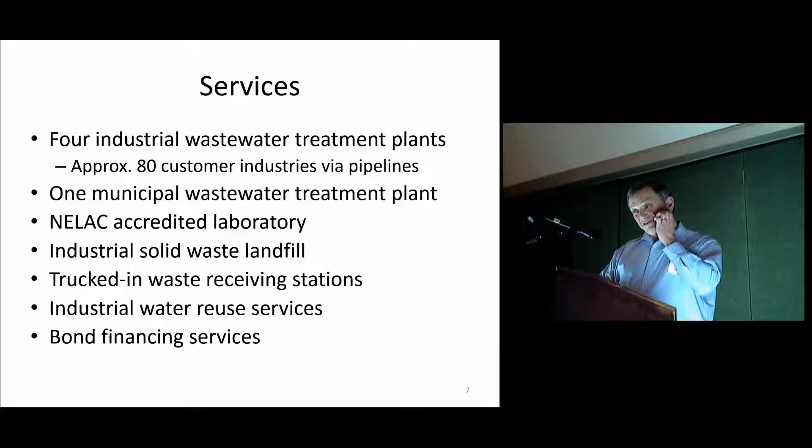We've already issued to date over about $3 billion worth of bonds, private activity bonds and tax-exempt bonds. So if anybody's looking at a project and you think it might qualify, get in touch with us.

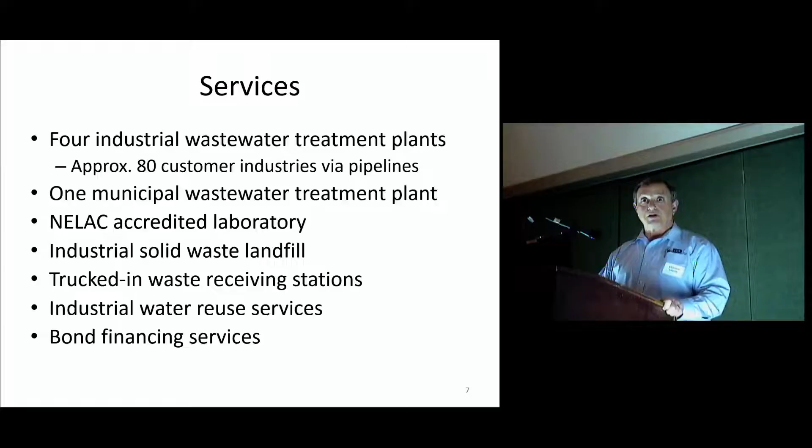Here's our value added: what we do is provide services to the chemical companies. Y'all make chemicals, we make our product — we clean up your water. Several people go together, and it's going to be cheaper to operate.

We've been doing this for 45 years, I think. And in the Bayport area in particular, by having that centralized waste treatment plant, that area has just exploded over the years. Even during the '80s, for those of you who remember, that area kept bringing in new plants.

Okay, we're going to talk a little bit about wastewater. Again, I'm assuming nobody knows anything. I only have — David told me to keep it under 2 hours, so.

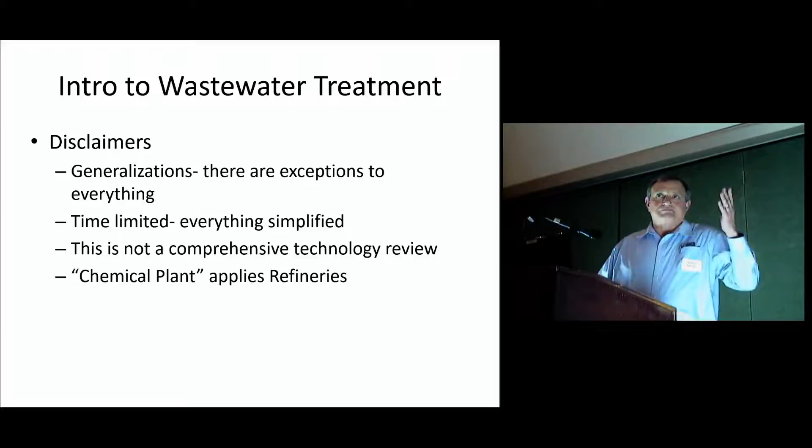I'm going to have to generalize a lot on stuff, right? Everything's going to be simplified. There's an exception to everything I say. I'm not going to do anything comprehensive, I'm going to simplify this. David said I had to throw some technical stuff in, so I threw a couple equations in there. And if I say chemical plant, it's kind of a generic term, refineries and so on. I know it's not, but just for the interest of time.

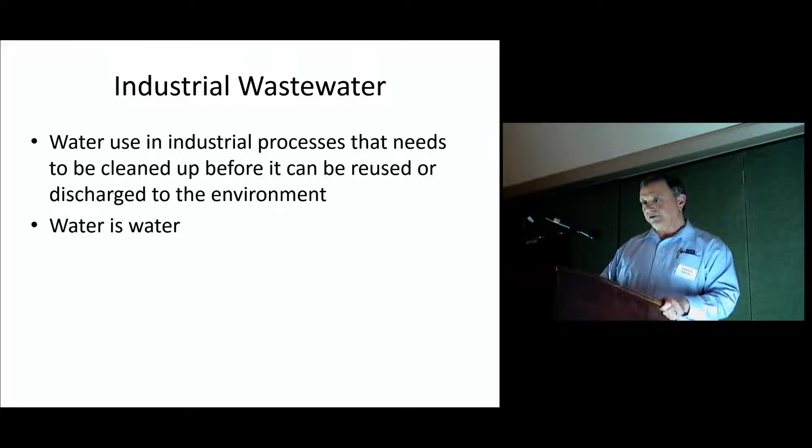We're talking about industrial wastewater, it's stuff that's used in a process and needs to be cleaned up. I'm going to use the term wastewater - that's kind of a no-no in our business now, since water's supposed to be water now because of all the reuse. But I'm old enough to do what I want.

When we're talking about chemical process industry, there's some things that really differentiate it from wastewater treatment, from a process standpoint. In the chemical industry, you pretty much have control over your feedstock. You issue certain specifications - if you don't get it, that stuff goes out, it doesn't come in. We don't have that luxury.

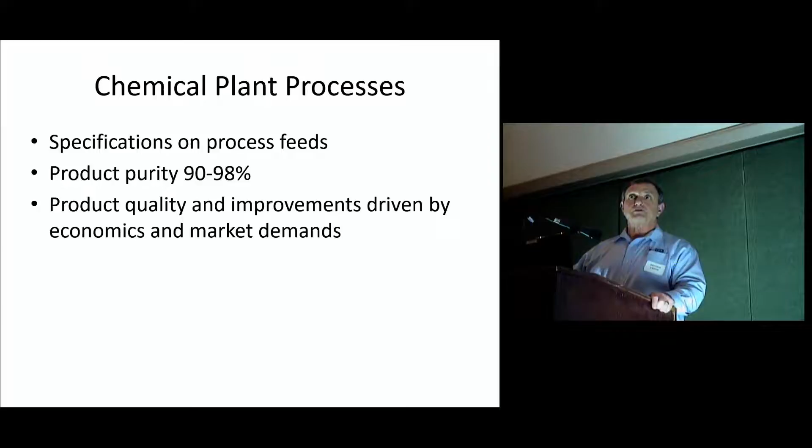The product purity you're shooting for is somewhere between 90 and 98% pure. And if you're looking at doing some improvements in quality, you've all done this - you have to do an economic analysis to see whether it's worth doing and whether the market will support the extra cost.

On the other hand, in wastewater treatment, we've got a lot of variation in our feedstock. We start out with something that's 99% H2O, and that's counting the dissolved chemicals and salts for the most part.

Our product quality is driven by regulations and different laws that come out in the interim. And in some cases, we actually have regulations that dictate how we have to design things - the actual technology that needs to be used.

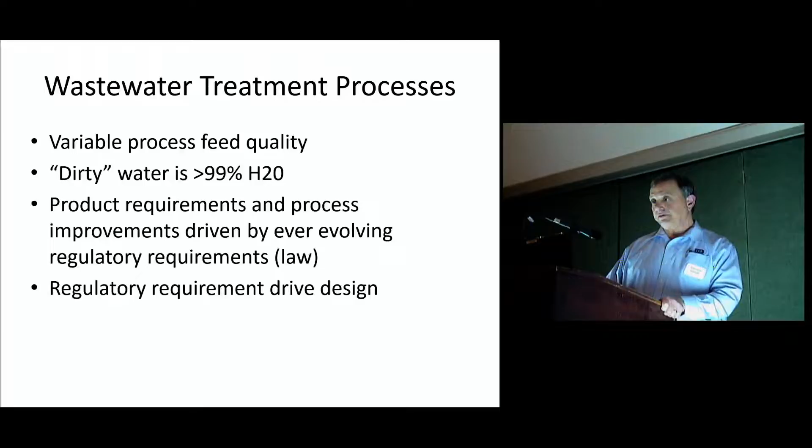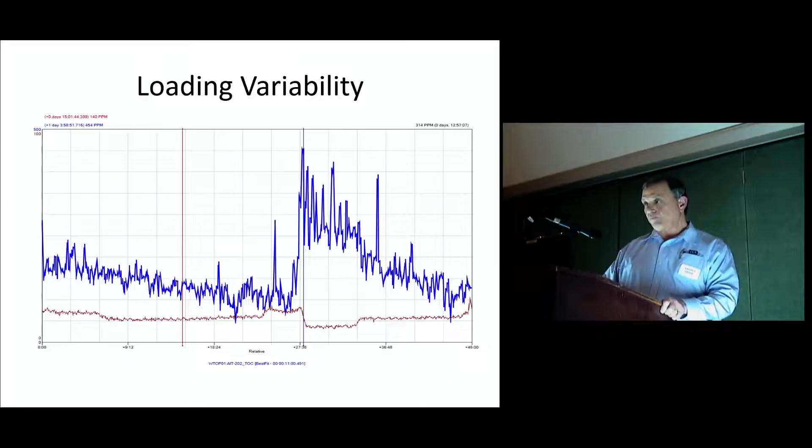Key regulations that have been driving things are the Clean Water Act, obviously, RCRA - the Solid Waste Resource Conservation Recovery Act - and the Clean Air Act. They all have a different way of demonstrating compliance.

You can't use the same analytical technique to measure the same compound from one regulation to the other.

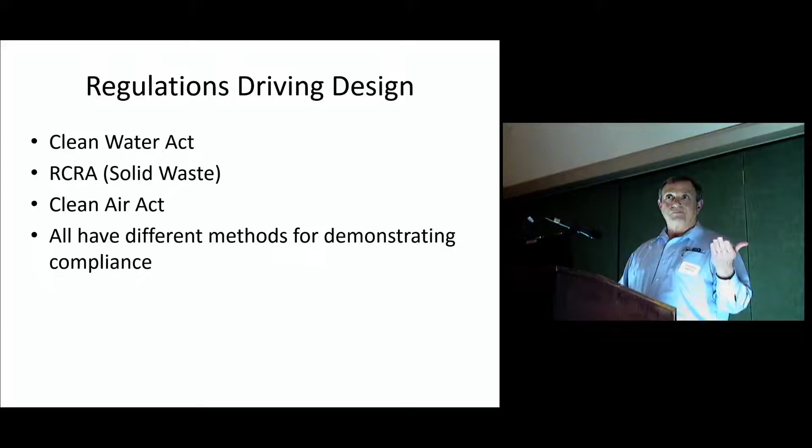In terms of what we measure, we measure a lot of stuff, and we kind of simplify to measure the impact of it. When we measure the organics, we measure oxygen demand - how much oxygen it takes, either biochemically or chemically, to oxidize it.

The interesting thing about the BOD test - the biochemical oxygen demand - is you take some stuff, put it in a bottle, wait 5 days, and measure how much oxygen is being used. Now, where did 5 days come from? It's a very scientific thing - it's how long it takes to float down the Thames River.

As a rule of thumb, the relationship between BOD and COD is known only to God.

We also sometimes measure the amount of organic carbon in the waste material - that's called TOC. We have a tendency to measure classes of compounds: organic nitrogen, phenols, oil and grease. But we also have to measure specific compounds: phenol, benzene, etc.

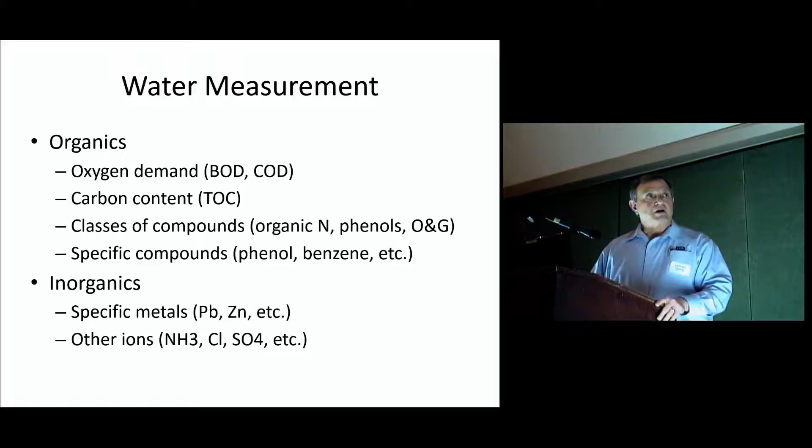We measure inorganics as particular ions. Ammonia and nitrogen - ammonia may be considered organic, but we measure the other anions too: chloride, sulfates, all those different ions in there.

We measure stuff at really low levels. We start out with milligrams per liter, and for other ions, parts per billion, micrograms per liter, nanograms per liter, and in cases like dioxins, we measure picograms per liter.

One of the things this is really useful for is for people that want to advocate a position - measuring at really low levels. You're discharging 500 parts per billion into the environment. No, we're not - we're only half a part per million, not billion.

And we have special sampling and testing requirements that we have.

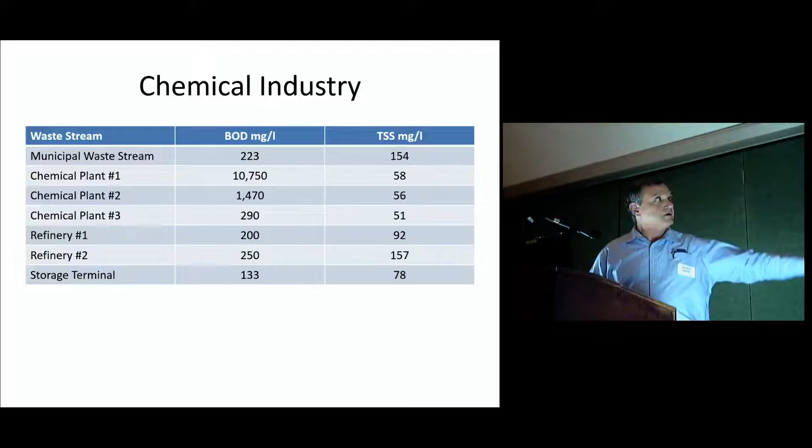Now I'm going to start talking about some of the more technical stuff. The main thing wastewater treatment was originally designed to do, for industry anyway, was to reduce oxygen demand on the streams. You put organic material and nitrogen in the water, you're going to grow bacteria. Bacteria use oxygen, oxygen in the stream disappears. Fish don't like that, so they turn over and die.

The other big thing, the biggest thing for a long time for municipal waste, was public health. In 1900, there was an abnormally large amount of deaths from waterborne diseases. Once they started putting in proper disinfection, that changed.

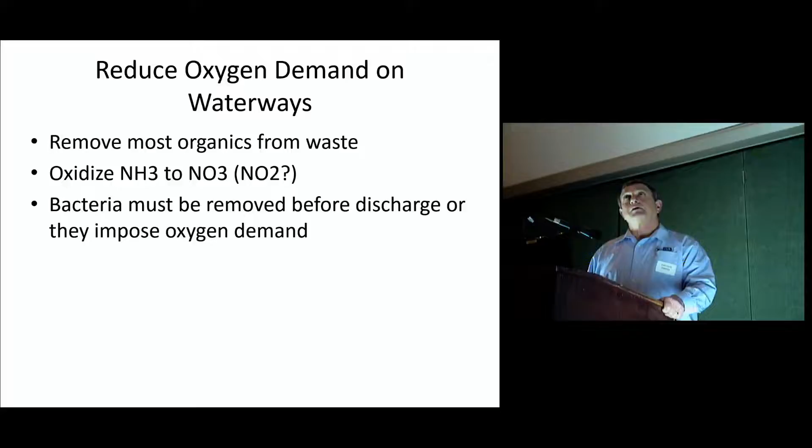I heard someone say something about overheads. These were originally overheads, okay.

Biological treatment is simple. You start out with bacteria, it eats some food, it divides. You have two. Obviously these are from Gulf Coast, they're all smiling. And you end up with a little bit of food left over.

This next one's a technical slide. Basic concept: you have food, organics, oxygen, and to grow more bacteria you need the proper nutrients - we're always talking about nitrogen and phosphorus for that. What you end up with is carbon dioxide, bacteria, and organics. Real simple thing. And then you take your bacteria out, otherwise the bacteria use up the oxygen in the water. It doesn't work.

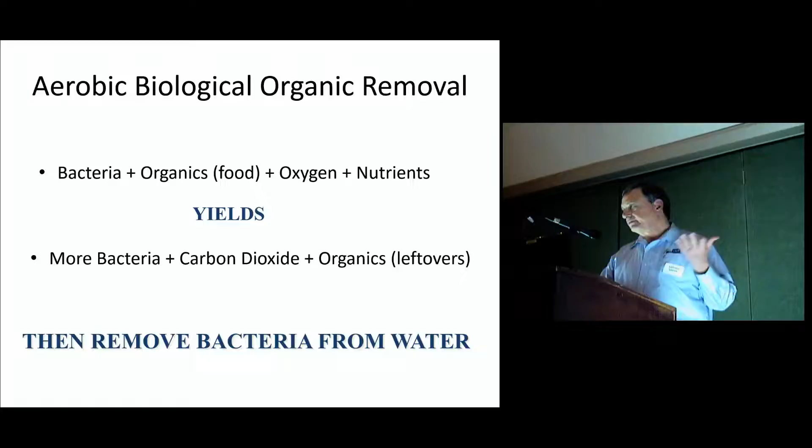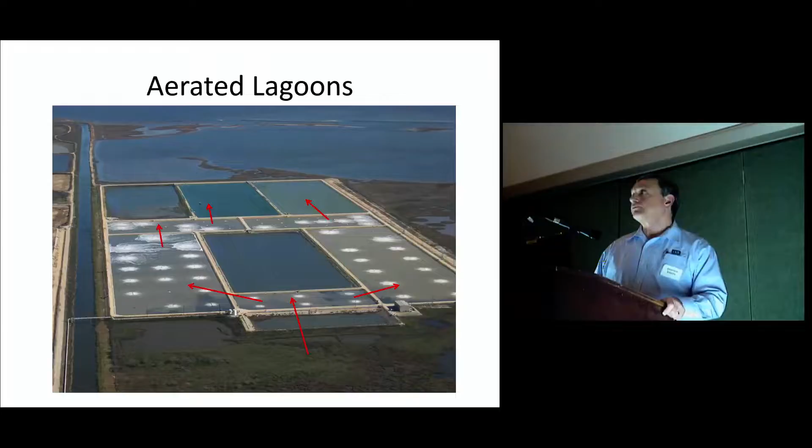This is really the simplest form of a biological treatment system, called the aerated lagoon. What you do is put the wastewater into a basin, aerate it, and bacteria start to grow. This particular one is 160 acres, if you have a lot of surface area - these are earthen ponds. This doesn't operate like this anymore, but this is what it was like back then. The amount of bacteria grown depends on how much waste comes in here. Like I said, it's 160 acres, or for any of you old farm people, it's a quarter of a section. So it worked pretty well.

The kind that's really simple and mostly in use right now is bacteria eats some food, it divides - the sludge process. We use aerobic bacteria, it's a suspended growth process. We may take out some inorganic compounds, but that's just by accidental adsorption. Works pretty well.

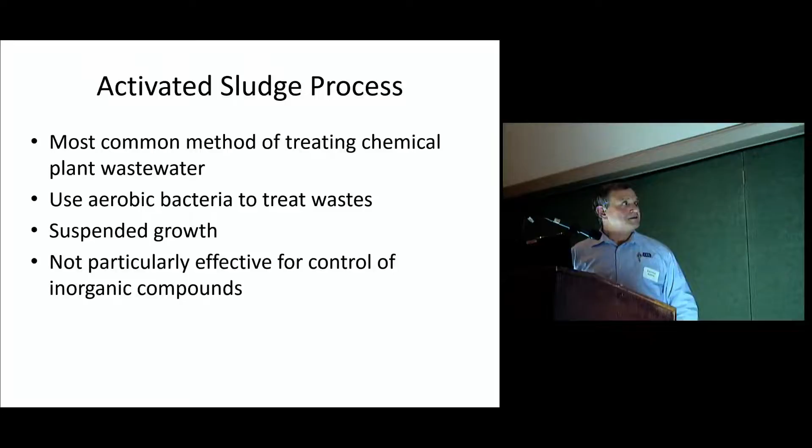The organics come in here, we grow bugs, or bacteria - it fits a whole lot better. We use aerobic bacteria. You go into an aeration basin, the bacteria grow in there, you keep your conditions correct. Then you go to a clarifier - everybody here has had unit operations, you know how clarifiers work. So you settle the bacteria to the bottom, collect that bacteria, and put it back into the aeration basin so you can have more bacteria and treat waste quicker.

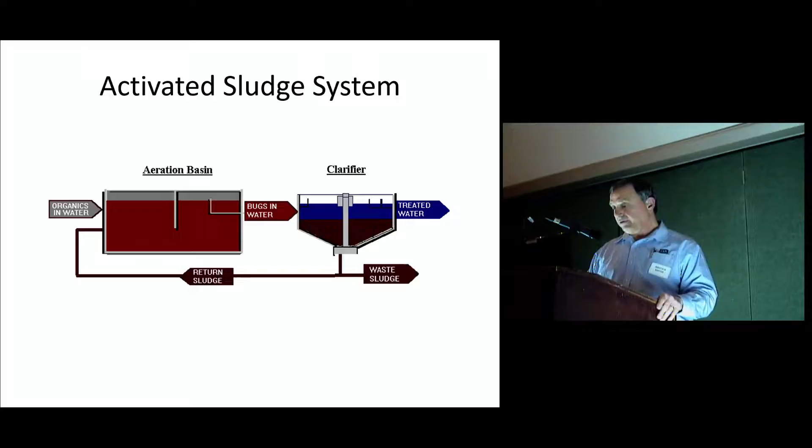Obviously closed loop systems do not work. So what we do is with some of the bacteria growing, we settle it to the bottom and then dispose of it, taking the water out of it. That's the waste sludge. This lets you have more bacteria in the aeration basin so you can treat waste quicker.

So what we do with some of the bacteria involves some basic process kinetics. Typically when you're designing a plant, you have a bunch of different compounds that degrade at a whole bunch of different rates, and we just kind of lump them all together and say this is what happens to the wastewater. It's also impacted by temperature.

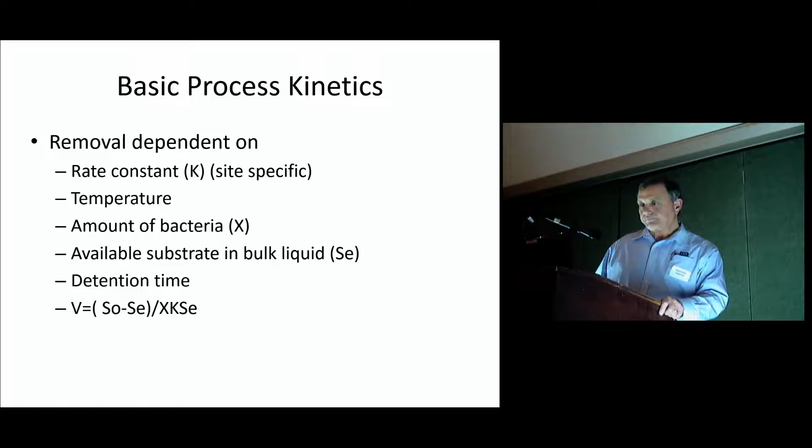In terms of impacting kinetics, there's a lot of things that could affect it. For the same type of waste, you can put some material in there that will actually inhibit the way the bacteria works, and they won't perform. If you don't have enough oxygen, the reaction rate is limited. If you don't have enough nutrients, you can't build bacteria.

For the same type of waste, you can put material in there that inhibits the bacteria from converting it all the way through to carbon dioxide without going through the building mode, and that takes a lot of time - it's a much slower reaction, very temperature sensitive. If you don't have your pH in the right range, you can actually stop biological activity - the bacteria just stop dead, unable to convert to carbon dioxide, without pH right in the correct range for the building mode.

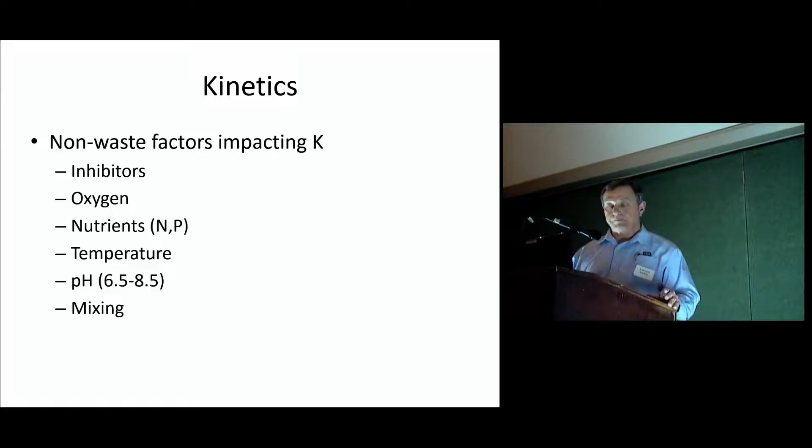Slower reaction, very temperature sensitive. You all recognize the Arrhenius equation. It works in wastewater the same way, except once you get above 35 to 40 degrees, depending on the system.

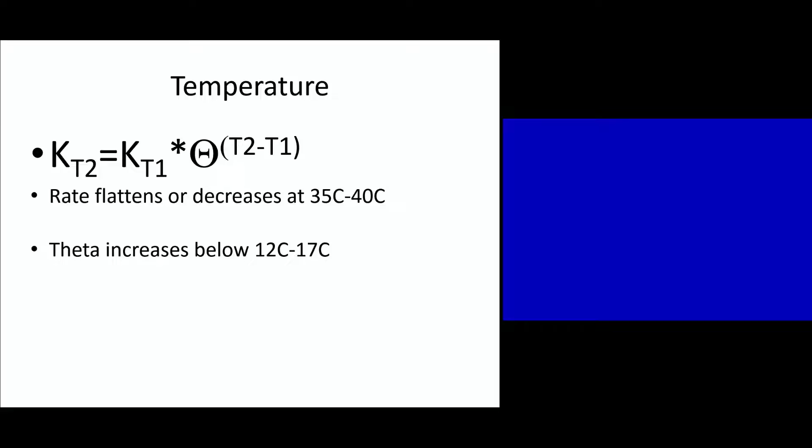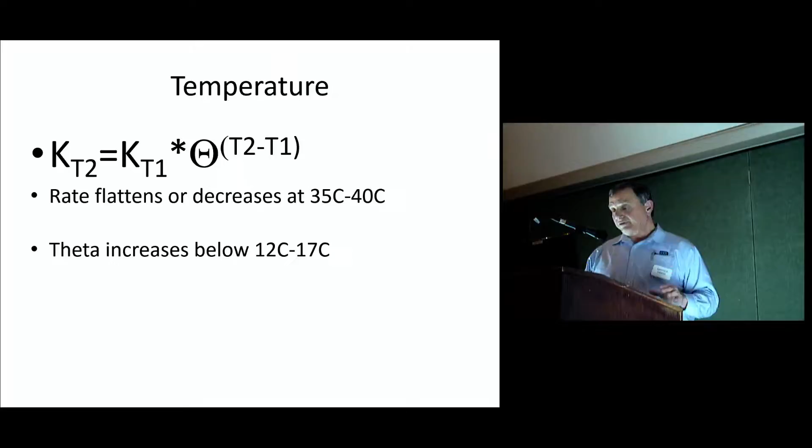The bacterial reaction rate will actually decrease above that range, around 95 to 105 degrees. When you get cold, you can have a rapid decrease in your ability to treat the waste, particularly with certain substrates, somewhere in the 55 to 65 degree range.

When we put oxygen in the water, most of the time it's atmospheric oxygen. There's a couple ways we do this, using surface aerators or air. The rate of oxygen transfer depends on the amount of energy you need to put in. There is oxygen in water even at very high temperatures, but if you're trying to keep a certain minimum oxygen level and the temperature is high, saturation goes down, solubility is lower, so it takes more energy.

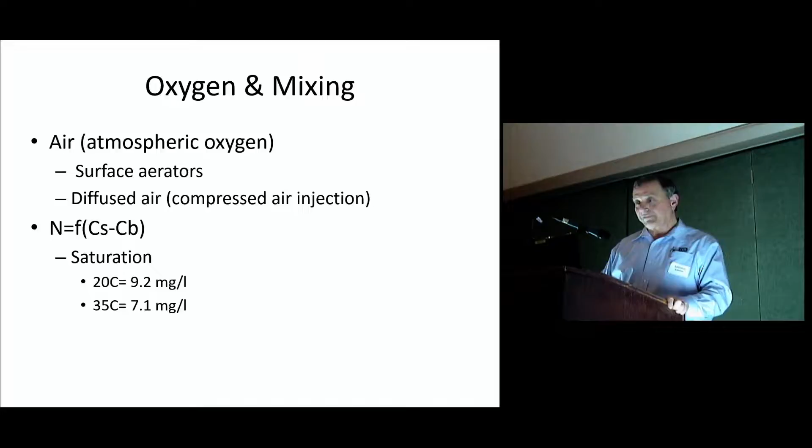One of the ways, particularly in the old days, was pretty common: surface aerators, high-speed surface aerators. Over there on the right, this thing runs about between 1,200 and 1,700 RPM. It throws water into the air, making real small drops. They're really good at transferring oxygen, but they're also really good at cooling and stripping things out of the water.

In the lower left, there's our low-speed surface aerators. These throw water in the air too, but they're geared down to be under about 100 RPM. They're more efficient than the other type, but obviously more costly because of the big gear.

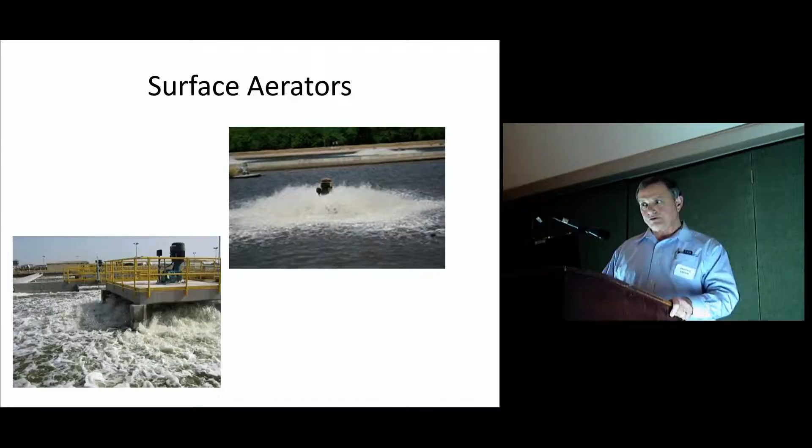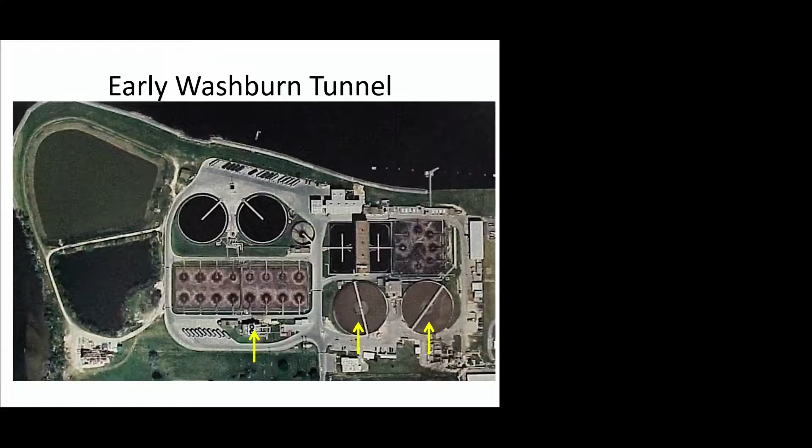The next step, again typical of pulp and paper plants in that day and age, we had a cooling tower. It was just a normal contact cooling tower with a bunch of wooden slats; water goes through and cools off, and that's another way to help control temperature in the aeration basins, activated sludge, clarifiers, before discharge to the ship channel.

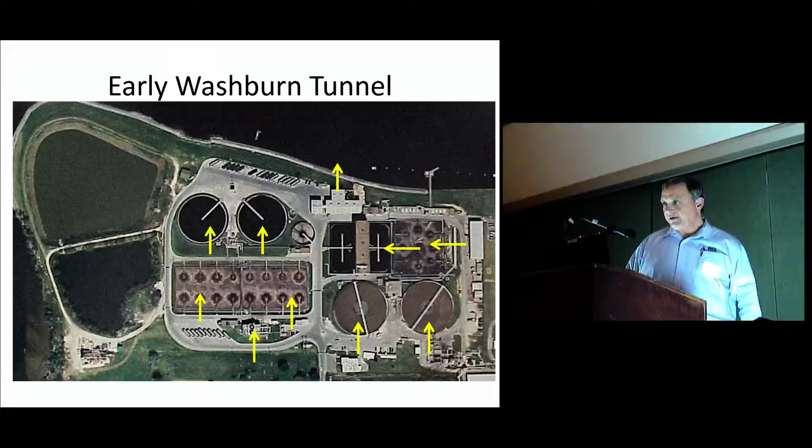So in 1972, the Clean Water Act was passed. By 1985, every water in the United States was supposed to be fishable and swimmable. It's really a framework for all the future laws that came out, and one of my favorite parts is they actually define classes of pollutants in here.

Prior to 1972, depending on where you built a plant, you would have discharge limits based on what the individual state thought the stream could handle. As part of the Clean Water Act, they said everybody from a particular type of industry has to meet a protected certain standard.

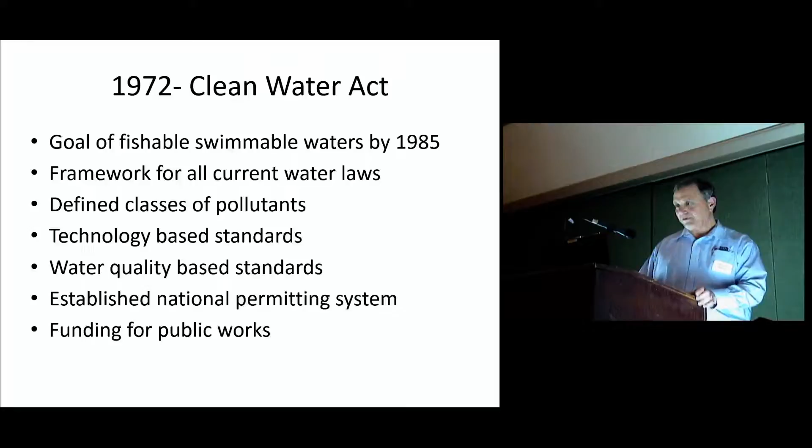NPDES is the National Pollutant Discharge Elimination System. The first phase technology standards were to be met by 1977 as the best practicable control technology, under Public Law 92-500, the Clean Water Act. By 1983, everyone was going to need NPDES best available control technologies, but some of the technologies weren't defined, so permit writers had to use judgment in deciding what these standards meant.

1972 is also the year I graduated and started doing that kind of work. A lot of the early design work we did was actually to demonstrate technologies through reactor studies and pilot plants, producing early designs that people considered the best available technology at the time, since 1972 technology just wasn't there yet. Then in 1987, they really came out with guidelines that had probably the biggest impact on us.

These were the organic chemicals, plastics, and synthetic fiber guidelines, and related standards. In 1987, there were around 70 different specific organic chemicals, plastics, and synthetic fiber categories covered.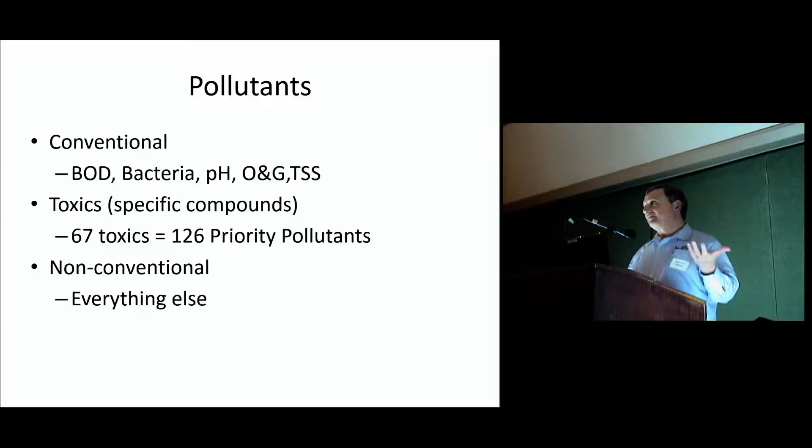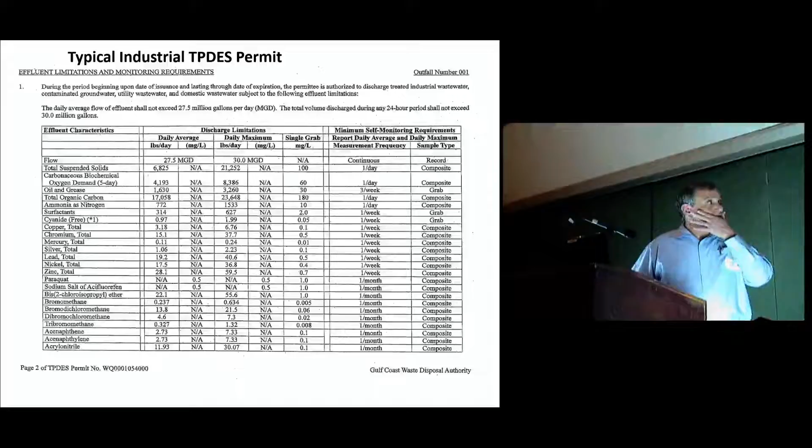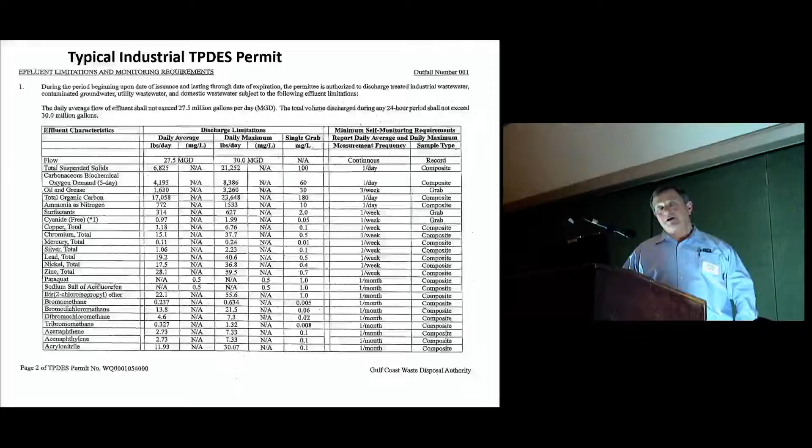What were all the requirements in that permit? There's some additional requirements written in there, one of which is a WET test, a whole effluent toxicity monitoring test, where you put bacteria or organisms in cups and see whether they die or whether the eggs don't form properly. If they don't, you have to figure out what happened.

Back in the 80s, before regulations tightened, this is what a treatment plant might look like. This is our Bayport facility. Gulf Coast treats all the wastewater from the Bayport Industrial Complex, and that area has been growing like crazy since it was first built. I'm going to show you the original Bayport treatment plant here.

In the modern day plant, that's a sump, but that was the original treatment plant. At this time, the wastewater came in, went to an earthen lagoon where we let the wastewater mix to take out some of the variability, then into two different activated aeration basins and two sets of clarifiers, and finally went to some ponds before discharge.

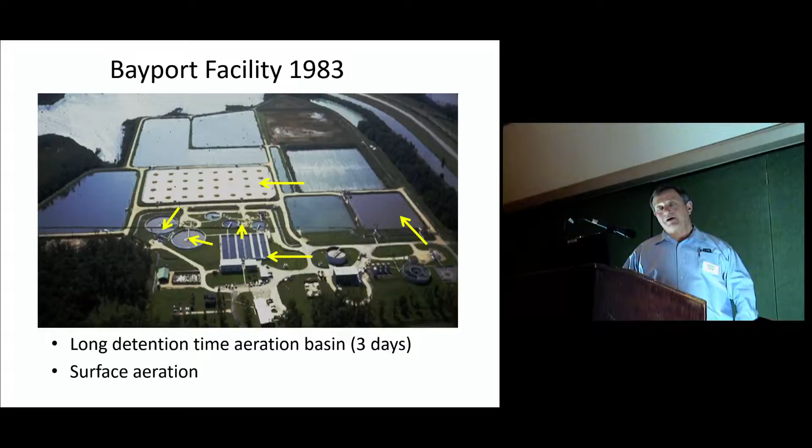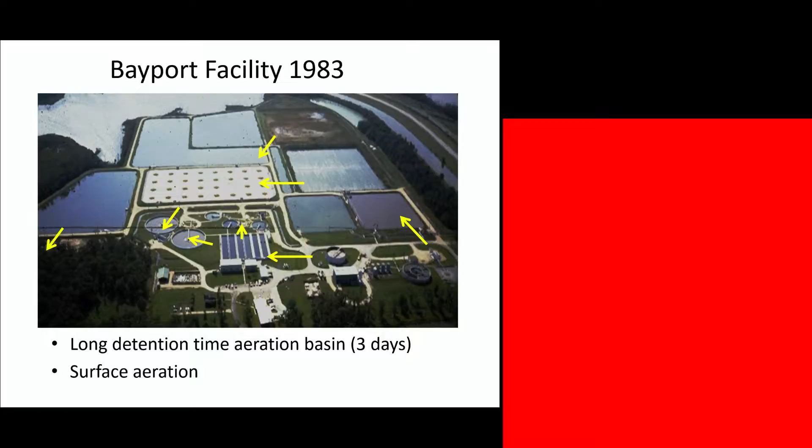The interesting thing is we have a very long sludge age with surface aerators, and surface aerators are really good at cooling. What we found is that little tiny plant could treat almost as much as this big plant during the winter, because of the temperature differential. We had enough capacity designed in, and it worked fine until later on.

About 1980, RCRA came along. One of the key things in RCRA is that the waste generator is responsible forever for the waste that's generated. They define hazardous waste into listed waste and characteristic waste. Characteristic waste is when you test something and it's higher than a threshold, making it hazardous.

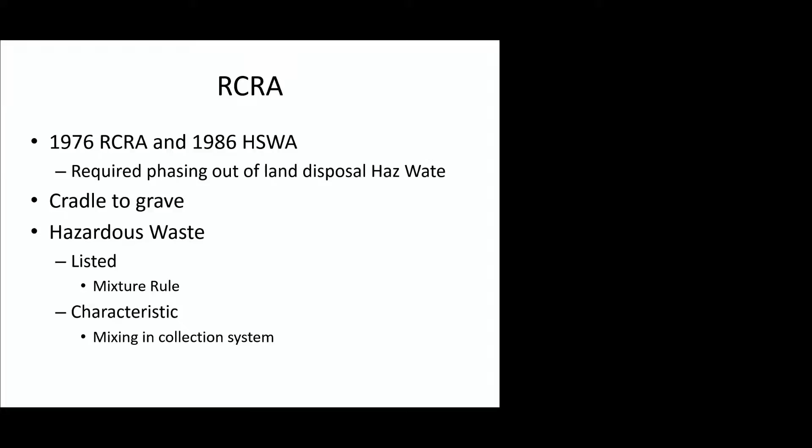One of the difficult things with listed waste is that no matter what's in it, if it comes from a particular listed process, it's hazardous waste, and if you put one drop into your swimming pool, everything in that pool becomes hazardous waste if you want to dispose of it. It's called the mixture rule - anything it touches. So if you're operating a wastewater plant with a listed waste stream coming in, all the sludge generated from treating that wastewater now has to be managed as hazardous waste.

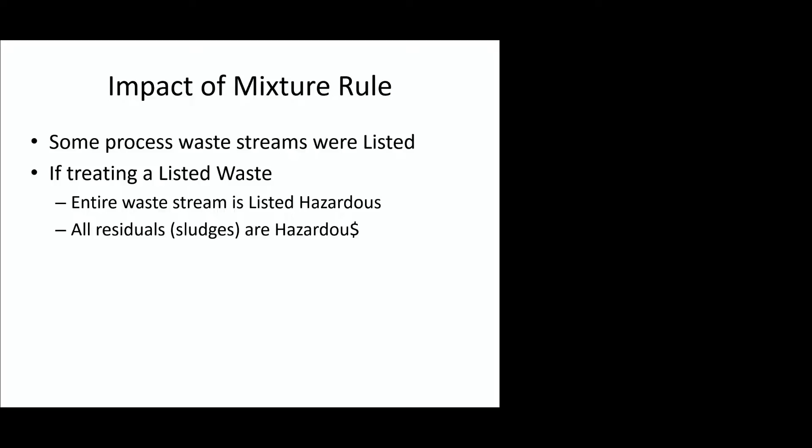In '86, as part of HSWA, they came out with land disposal restrictions, which say you cannot manage hazardous waste in a land-based treatment unit like an earthen basin. That meant if an earthen basin received a stream that was hazardous waste - say 0.5 parts per million benzene - that was no longer allowable, and it had to be treated in a tank instead. It didn't matter what the concentration was inside the basin; what mattered was what was going into the basin. So even if it came in at parts per million and was diluted to 10 parts per billion inside, it still wasn't allowed.

So a lot of people had to get out of their land-based units or get rid of the benzene before it came in, and there's some other compounds. Benzene is just an easy one to remember. Some people actually changed methods in their production unit. You don't see as much carbon tetrachloride in use as you used to back then, because of this. Now, the good news, if anything mixed in the sewer, you tested what came out of the sewer, not at the source.

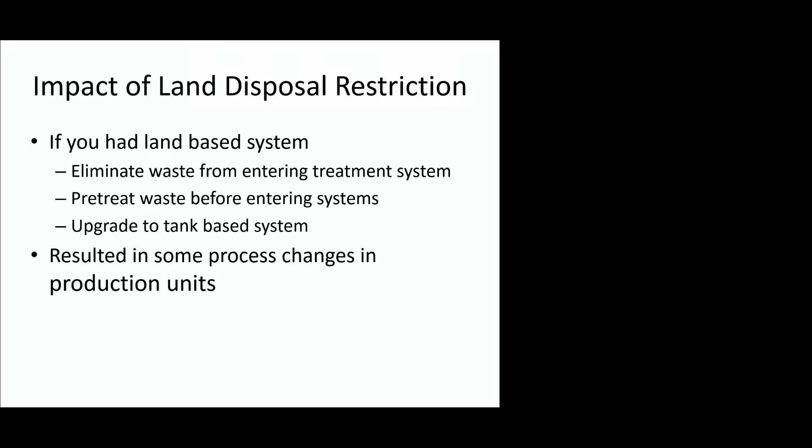One more thing I want to say about RCRA. RCRA actually had defined technology in it. The regulations came out and said, if you're going to do this, it has to be done like this. As opposed to the Clean Water Act, which is pretty much, you have to meet these standards. We don't care how you do it.

Then the Clean Air Act came out, and got another acronym here - that's the Maximum Achievable Control Technology. So for certain things you had your control technology, but you also had certain ambient standards. For example, ozone - that's one that impacted us particularly in the Houston area. If you're not meeting the standard, then the state had to come up with an implementation plan.

In the 90s, two things hit. One was the benzene NESHAPs, the national emission standards for hazardous air pollutants. In the Houston-Galveston area, we also had a state implementation plan that required the control of ozone. So first we had the benzene NESHAPs, we had Reg 5 that came out of the state on how to control air emissions, which included a provision on wastewater. No longer could you collect wastewater in these open channels - you had to have confined pipes.

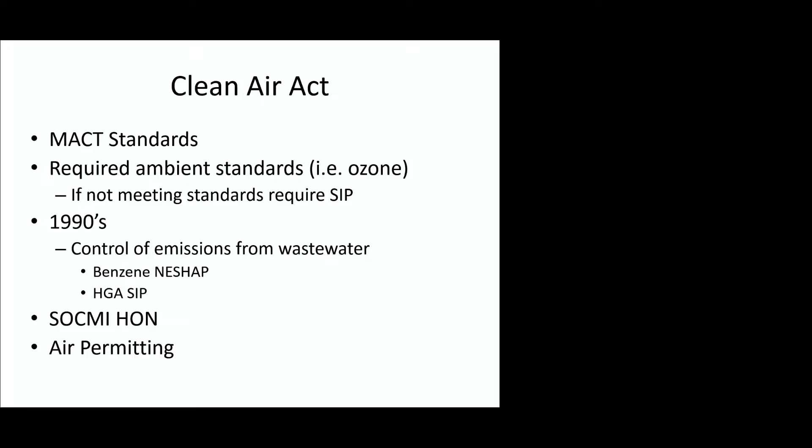Now, measuring emissions off a wastewater plant is a little bit different than in a process plant. In a process plant, you go up to your emission source, you measure it, and you get a reading. We don't do that - we have to measure what's coming in the water and put it into these magic models. These models tell you what's going to come out of the plant. So it doesn't matter what you do - that's what you're regulated by.

For all these different compounds that come into your plant - at Bayport, I think we measure like 100 of them coming in - each has a separate biodegradation coefficient, those K rates, and the model accounts for that. If you don't agree with it, you can do some testing and come up with a site-specific one. They use the octanol-water partitioning coefficient to determine how much is going to stick onto the sludge that's in there.

In terms of sinks, obviously you have some left over going out in the water. In terms of what's transferred, everything's transferred based on Henry's law. They calculate how much is going to be stripped out - you have the surface area and the aeration system. All of a sudden, these high-volume aeration systems, like the coarse air system, start getting more emissions out than some of these other systems. Surface aerators were horrible - it's like the best strippers ever invented.

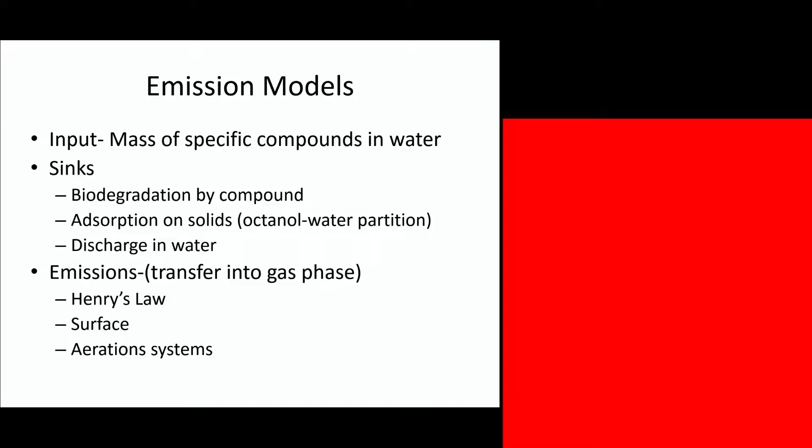So, as a result, designs of the system started changing. At Bayport, we made some changes on that - even though that's what you're regulated by. Part of it was because, not that we had hazardous waste coming into the facility, but we had a commitment to our industrial users who wanted to make sure we didn't have any potential liabilities coming in the future, so they asked us to stay out of earthen basins for treatment units. So we put in these first-step aeration tanks, and we had to modify our systems to put in jet aeration systems, got rid of all our surface aerators, and kept the temperature up.

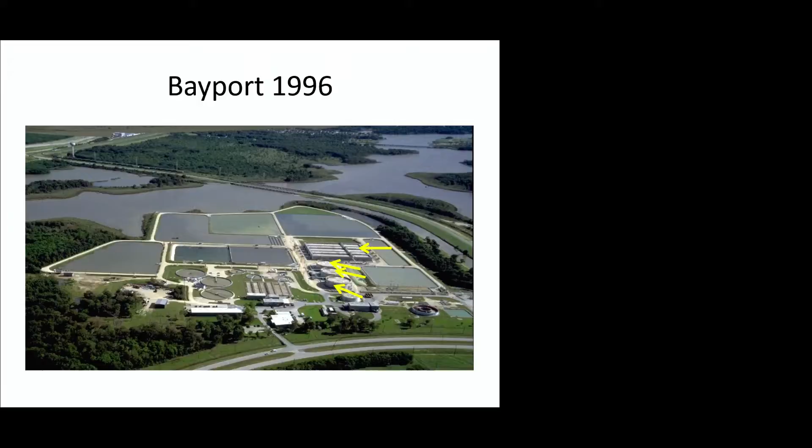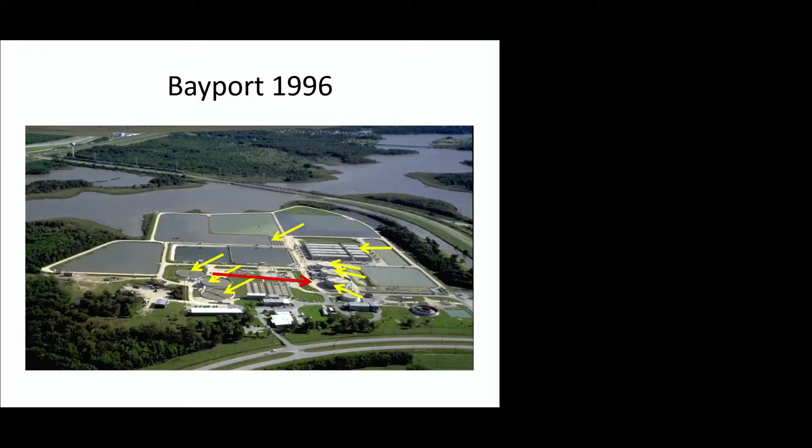We put in a second step system. The advantage of this is in the first step system, we're getting most of our volatile organic removal rates. We get a very high rate in there - probably 90 to 95% destruction just in that high rate first step tank. Then we can go ahead and treat the wastewater: the clarifiers, disinfection tank. Our return sludge would go back to the front of the plant, to the first step basins.

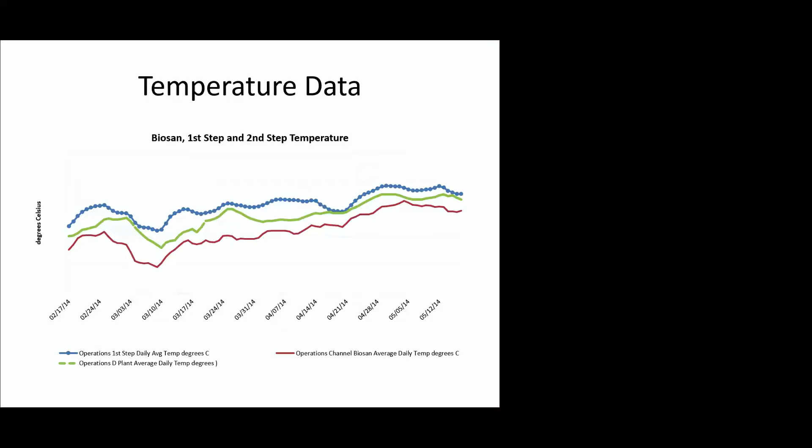That also kicked us up above those magic numbers, and we started having treatment problems. We had to put in some kind of cooling, but we can't put aerators in there anymore, and we can't do anything up front because of the VOC controls. So we got really innovative here and put a cooling tower in for the return sludge. We still use this system during the summer months, which are getting longer as we go along. The return sludge goes through the cooling tower and then back in, and the cool water mixes with the warm water and gives us cooling.

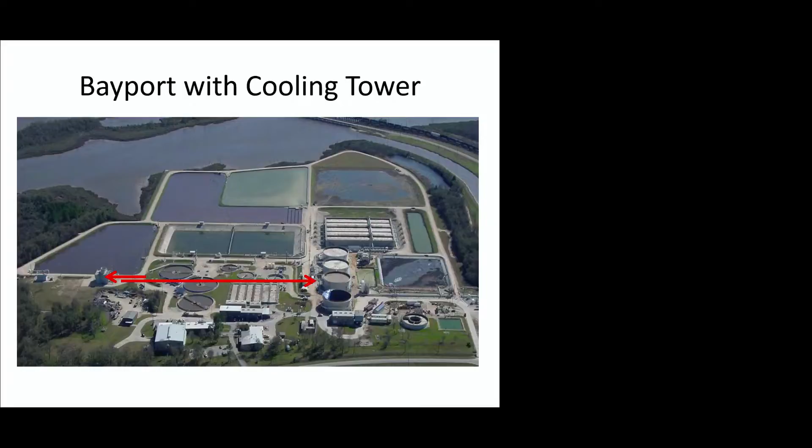The other thing we started using is reducing the gas flow by going to oxygen. You can get pretty high transfer efficiency if you use pure oxygen, but you have to buy it - it's not free like air. That's because the saturation concentration is a lot higher, over 40 milligrams per liter rather than 9 milligrams per liter at 20 degrees Celsius.

However, remember the CO2 that you're generating? If you have too high a rate system and too much CO2 going, then your pH drops. We have to stay in that pH range, or it doesn't work. So there's a kind of balance in there. At Bayport, we use a hybrid in our first step tanks of air and oxygen - they don't mix together, they come in separately - to get our transfer.

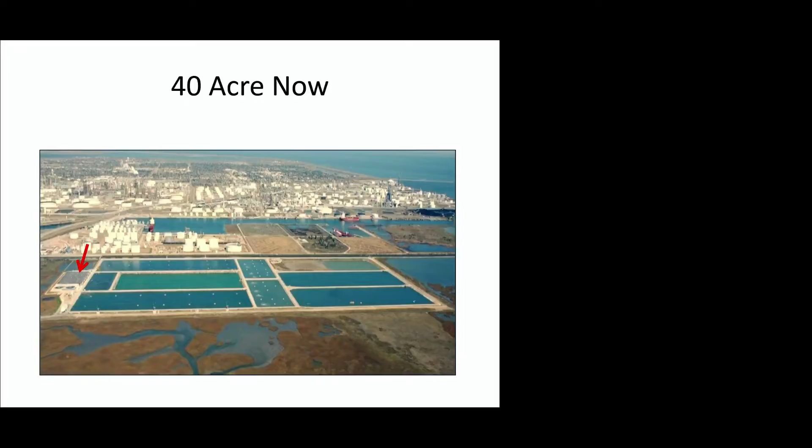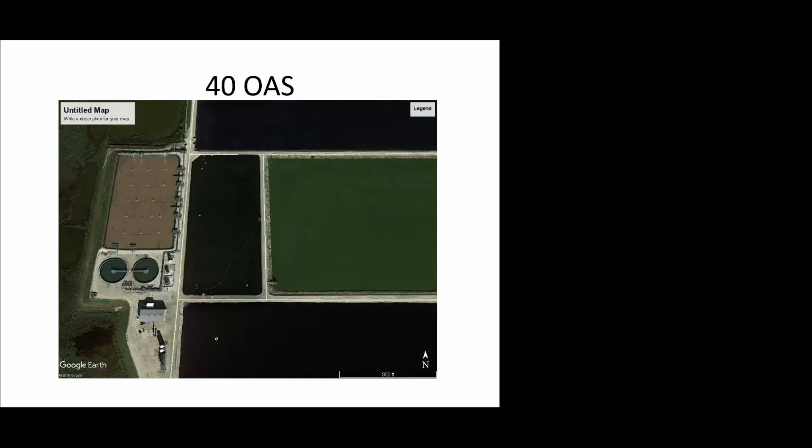That first air system we saw, that nice aerated lagoon system, obviously wasn't going to meet air emission standards. We had to upgrade that, and we turned it into a pure oxygen activated sludge facility. This is single lined basins because there's no hazardous waste going in - it has one synthetic liner, which makes it still a land-based treatment unit. Waste comes in as activated sludge, then goes through a series of ponds, little oxidation ponds. We're using what's called an ISO unit here - a floating oxygen injection unit. Oxygen comes in, it's a down-forcing mixer that shears the oxygen, and it has that little hood that's supposed to trap any extra bubbles and recirculate it.

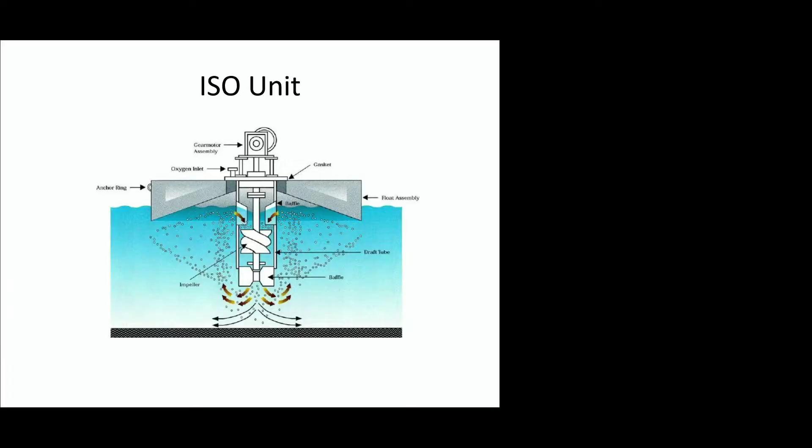This is our Washburn Tunnel plant. The paper mill shut down, mostly because they couldn't compete with all the environmental improvements they would have to make. Our Washburn Tunnel plant also takes paper mill waste. So the first thing - no more cooling tower, since cooling towers don't work on untreated waste. We also use a floating oxygen injection unit, and like Bayport, we have a two-step activated sludge system. In this particular case, the incoming waste pH was low enough that we didn't have to worry about the pH problem. We had all these nice surface aerators in the back, and we ran our temperature models and found we could actually keep our temperature cool enough in the back end during the summer, so we use that.

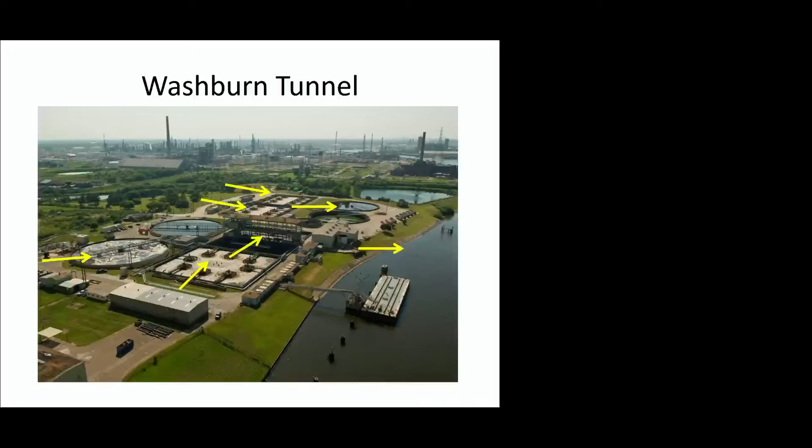Bayport kept growing, and industries kept coming in, so our emissions kept going up, and we eventually had to put covers on our tanks and put in a thermal oxidizer to keep controlling our emissions. Everybody says we don't treat wastewater anymore, we clean air.

Unfortunately, they're right. Okay, let me see it here.

For the air emissions from that, we use exhaust blowers, and we use the second step basin as a biological removal mechanism for air that comes off the first step. The bacteria actually broke it down. We had to go to the state and do a bunch of testing to demonstrate this, and I think we're the first in the country to get this type of control technology approved.

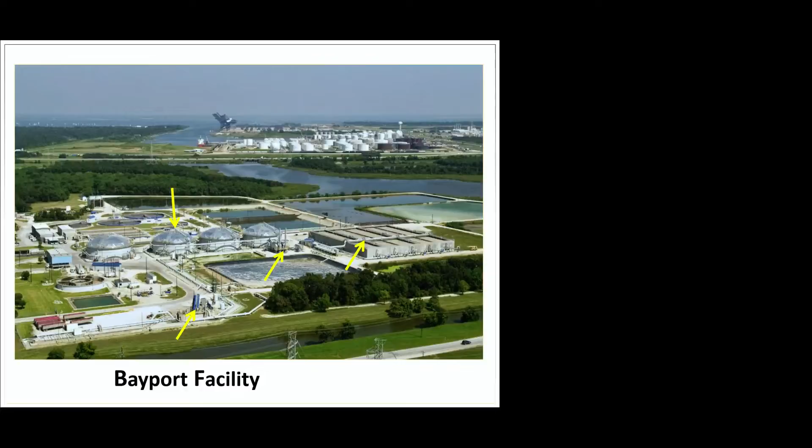But we're not done yet. Okay, we're done. Okay, we're done. Almost done tonight, don't worry.

Latest things that are coming out: in the Houston-Galveston area, there's a concern about bacteria in our waterways. There's a lot of data showing that a good deal of that is from non-point sources, people that discharge waste. It doesn't matter, you can't control those.

In one particular study, they've shown that a lot of the bacterial levels in the oyster beds that people are concerned about are due to migratory fowl. That's right, migratory fowl. It comes in. You can see the migration pattern here, the levels. Birds come, they go away. And unfortunately, increased hunting licenses is not a control technology that's accepted.

So, we don't really measure the pathogens. We have to measure indicator bacteria, because in order to measure bacteria, you have to grow it, and growing stuff that's going to make you sick is kind of frowned upon. So instead, we grow some indicator bacteria, which is, of course, present everywhere.

And it's getting more and more into industrial permits now. We're starting to see bacterial limitations put on their discharges.